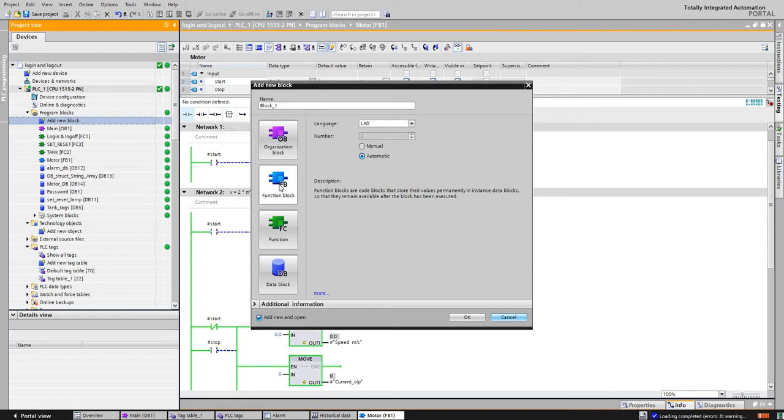The data in it, like speed, whatever the speed and ampere and the power and whatever the parameters are, is going to be stored in that instance DB, which is created after creating the FB. Okay, so we will call this and give it a name, like here I have created a motor called

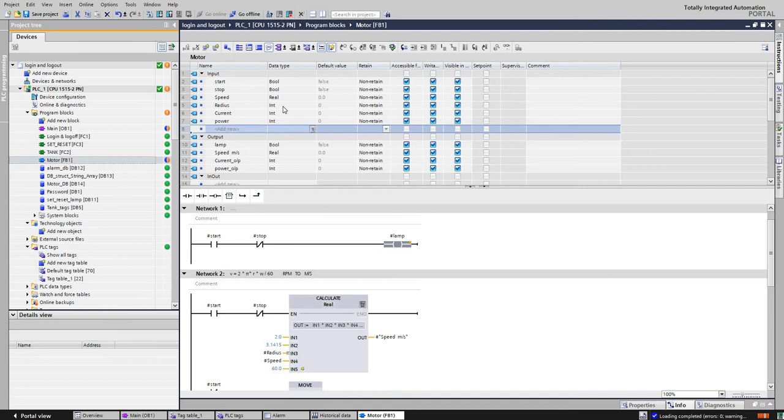So here I have created a small program. We have given a start, a stop bit, and generated a lamp. We can call it a lamp or we can call it a motor output. Whatever you want, you can call it. Just I have written lamp right now. So this is network 1, this is network 2.

Now, we use all local temp tags here. We can also use a global tag. If you want a global tag, we can use it here also, but I have used local tags.

Okay, and then in this network, I called block calculate. So if you want to do any type of calculation, you can calculate by using the calculate block, or you can create it manually by add, subtraction.

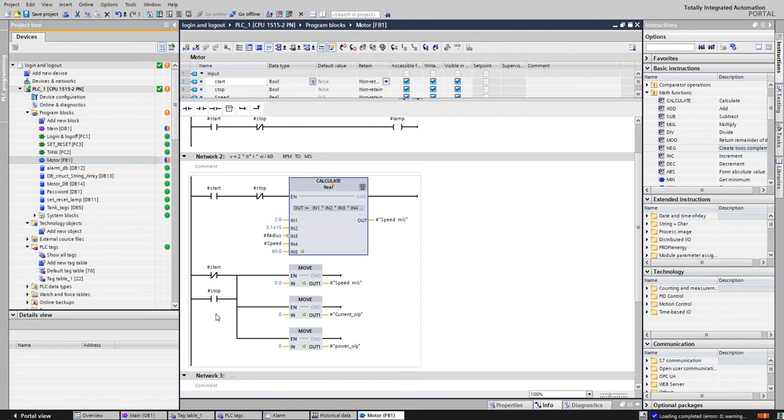And what tag I use? Local tag. Keep in your mind, when you create an FB, you mostly use a local. You can use a global tag also, but I have used the local tag. And after that, if the start is not given, then move 0, and if stop is given, it also moves 0 to speed, current and power.

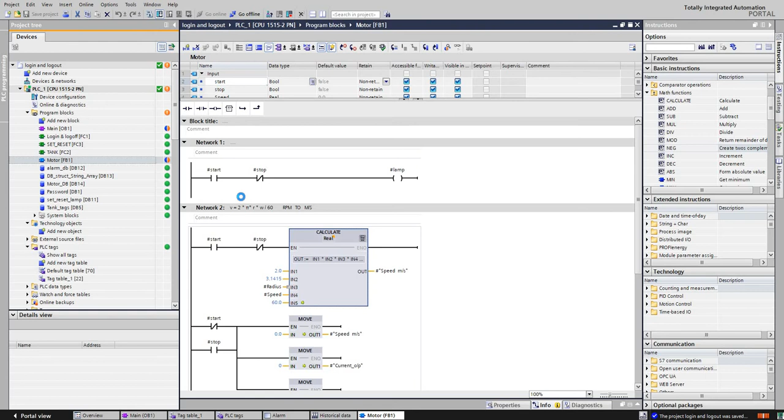And after that, we just move the value of current and power to the output current and output power. Nothing special done here. It is a small block, a small program to understand what I have done. I have calculated only speed in RPM to meter per second. Keep it in your mind and do your programming.

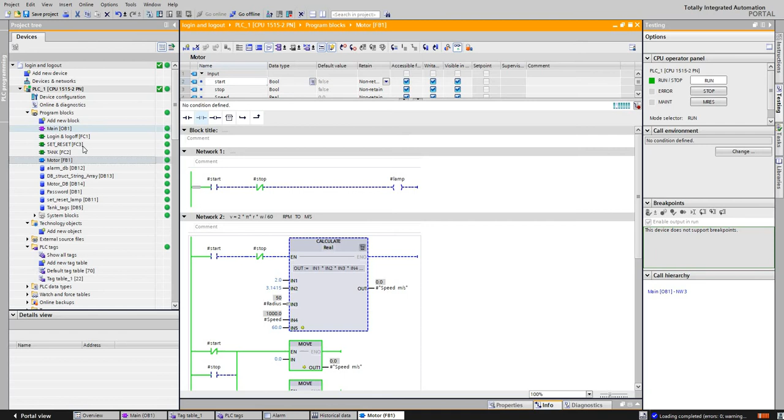Okay, so what I have done, I have created an FB. If you don't understand what I have done, just go through the video.

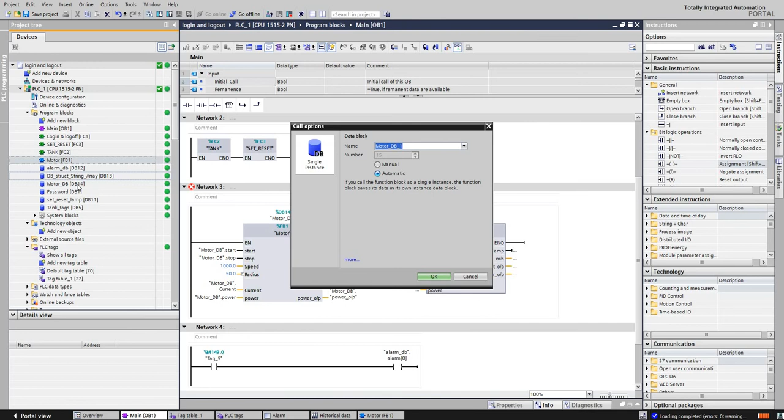So right now this will create an instance DB, motor DB1, because I have already created one here called motor, where it is motor FB. So I am not going to create a new instance. I am going to delete this one. Here also I'm going to delete this one. I'm just showing you how I created the FB and how I drag and drop.

So in your program you can also create the same type of analog sensor FB. In projects multiple analog sensors are there, so you are not going to write the program for every single analog sensor. You just create one FB and call it wherever you want in your program, multiple times, and just give a tag, and your block will work properly if you have created it properly. If not, it will not. Then just try again and go through your process.

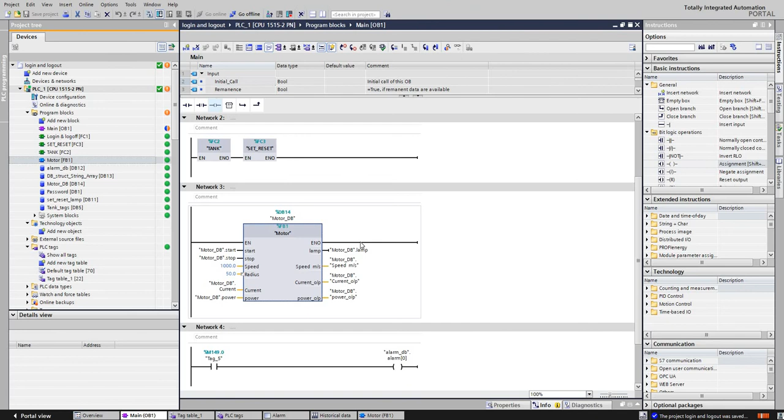Then we will see, okay, here we'll go monitor that. Okay, right now our start is not given, stop is not given, but our speed in RPM is coming from somewhere, meaning from the drive. It can come from the drive. I have just manually put here a value of 1000, then the radius. I have used a radius here. This is the formula; we need a radius.

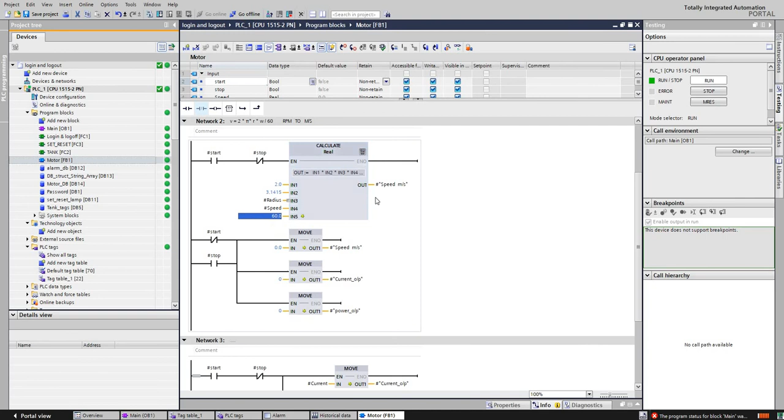After that, pi value, radius, speed in RPM, and divided by 60. So after that we get the speed per second. So we will go to our main block and I will show you what program I have created. Once I start my motor, it is started right now. Right now I have given the lamp as the display name, but you can write it here as a motor, or I can just go there and write motor, but right now I keep it as it is.

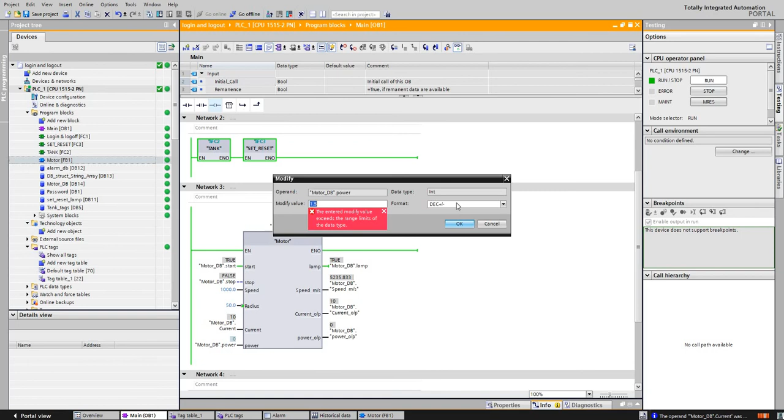Okay, so here I have put some value, and the calculated value is 5235 with a decimal point. You can show it with a decimal point or just as an integer value, but I have given the float value here. And if I put the current as 10, now my current is 10 as output, and my power is 1.5 kW or whatever the power is. The value exceeded, so we'll write one here and we'll see. You can see the power is 1 right now.

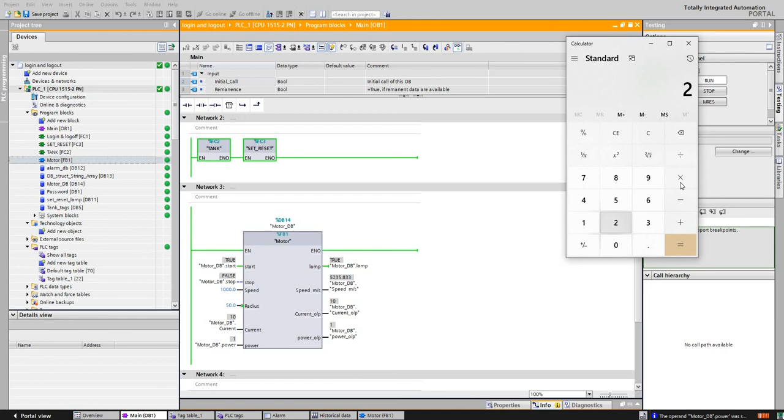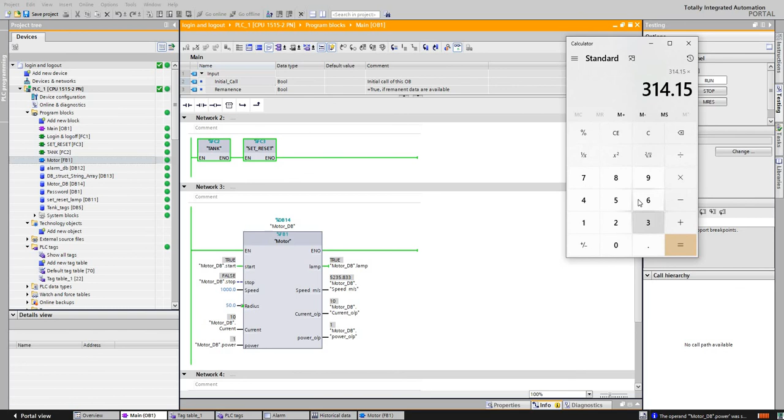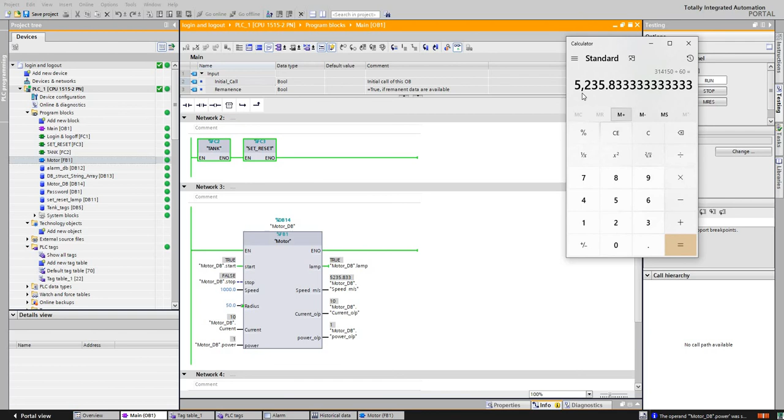Current is also 10 because I have only done a move. Or you can check the calculation. If I go to the calculator, a simple standard calculator, 2 into pi value, 3.1415, I think so. Then we will multiply with the radius. Radius is 50. After that we multiply with the RPM value, 1000. Then we divide by 60, and we get our value. It is 5235. So it is calculated correctly.

Now if I go to the plant and just stop by pushing the stop button, all my values should go to 0 because my motor is shut down. So all my values are 0. And if I close this one, now I have released my stop button. Now the stop is released, and start is not given. Now again I will give my start. You can give RPM here as a real-time tag, so the value changes in real time. You can display it over the HMI.

So this is simply how we create an FB and what the need for an FB is. Using an FB makes it simple. The program is very simple for you to understand, and to show to another person. As a programmer, you should always write a simple program so that whoever handles that part in industry understands it. A maintenance person, an operator, or another person should understand your program. It should be in simple language. Okay, so this is the simple FB program and how we create it.